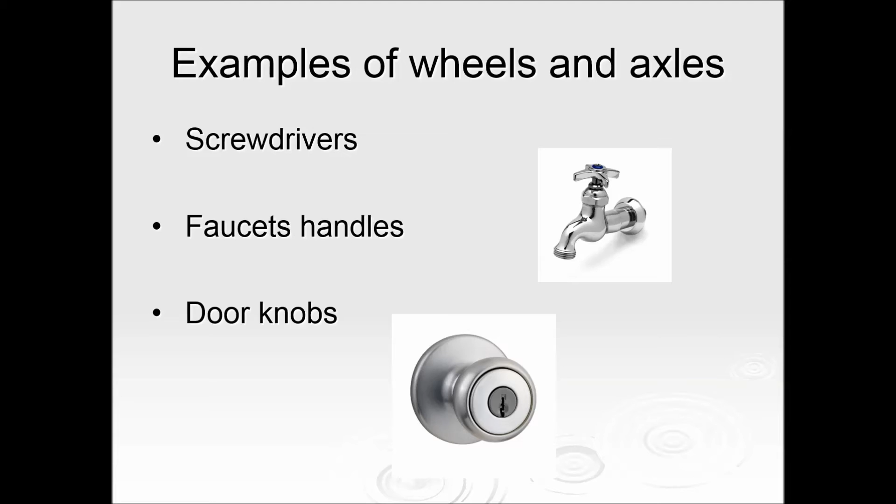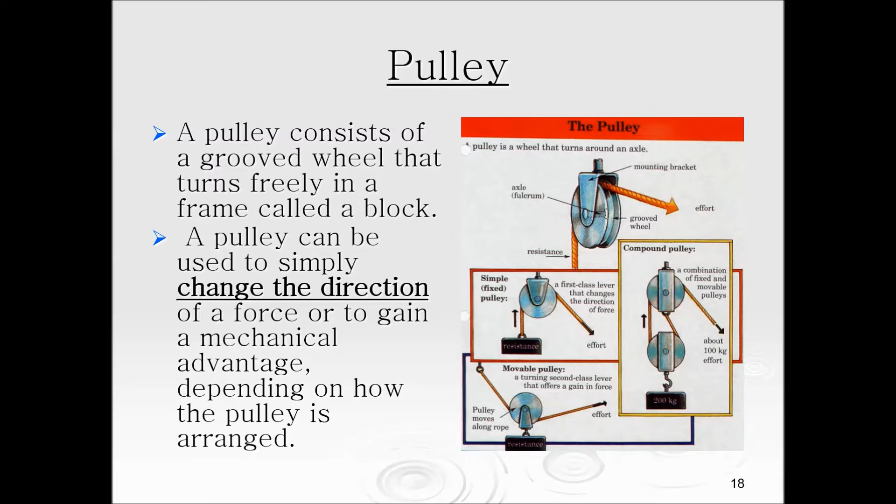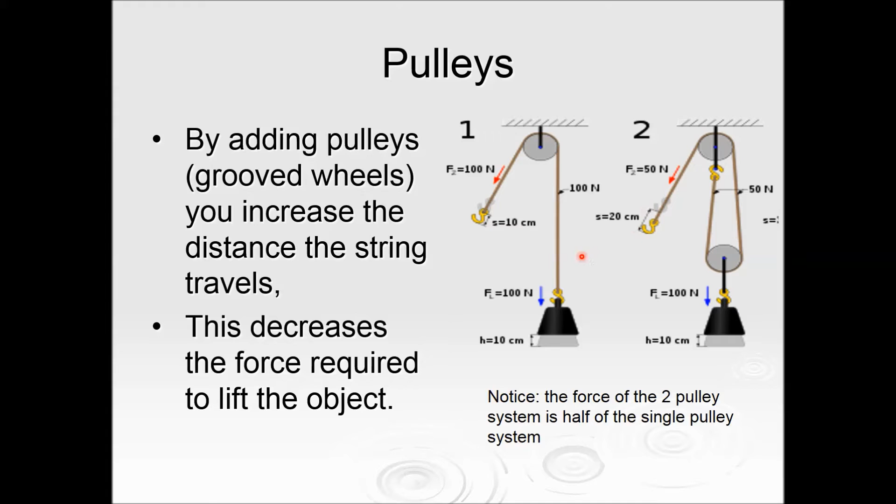We have two different types of pulleys. One is called a fixed and the other is a movable. A fixed pulley does not move with the load. So up here at the top, we've got the fixed pulley. Notice the string is going to move, but the location of the pulley is not going to move. These change the direction of the force, but do not change the amount of force or the size of the force required. So fixed pulleys change the direction of the force, but not the size or the amount.

A movable pulley, on the other hand, is attached to the load. And these do not change the direction, they change the size. So on your paper you should have a movable pulley. It is attached to the load, so it moves with the load. And movable pulleys change the size of the force, but not the direction.

So this one you can see is a movable pulley here. I still have to pull up to get the object to move up. This one down here, notice the string is going to move up and the load is going to move up. So this is actually a double pulley system, whereas this is a single pulley system. And this one's movable and this one's got a fixed pulley and a movable pulley.

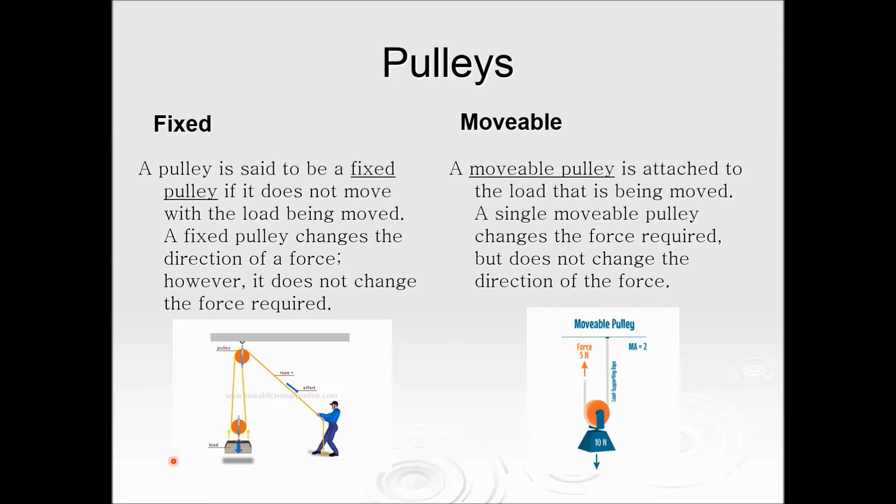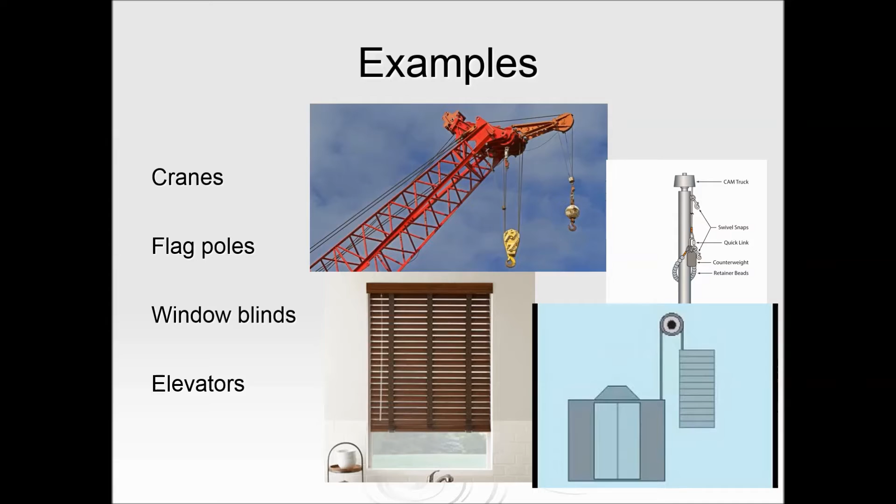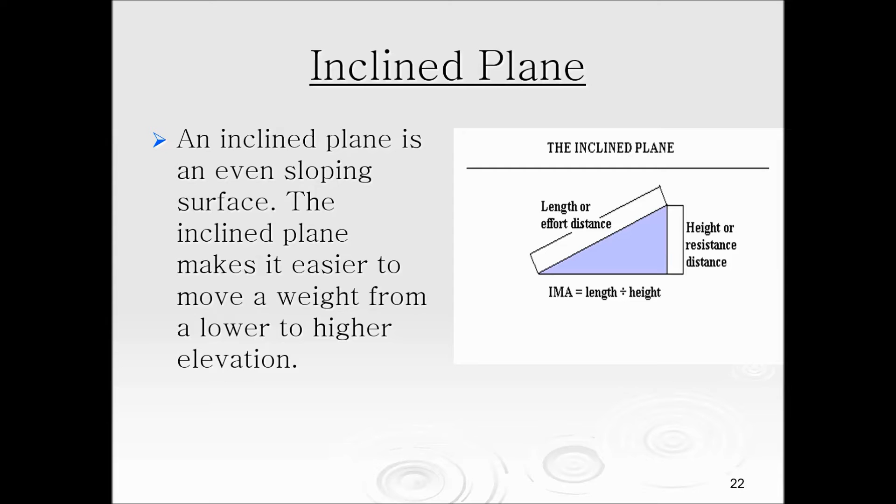So pulleys mostly change the direction of the force, but the more pulleys you add, the more it's going to change the size. So let's look at another super common kind of simple machine called an inclined plane. These inclined planes are sloping straight surfaces. And it makes it easier to move an object because it's increasing the distance the object is moving.

So as the length of the plane increases, so the longer the ramp length, the less force is required. The longer your ramp, the less force is required. So the force required decreases.

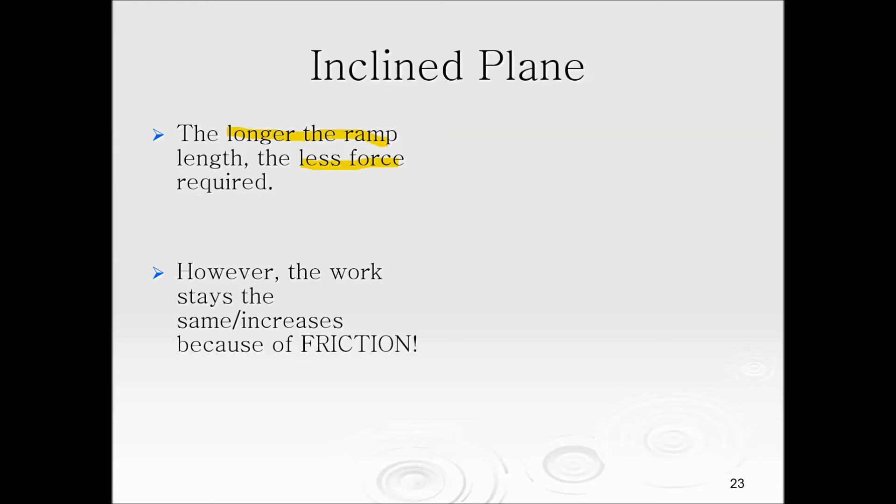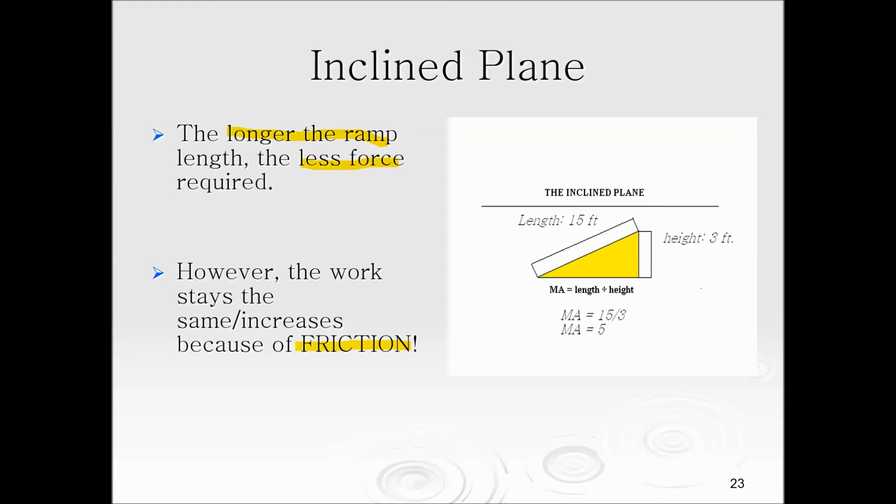However, we're always going to have the same amount of work because you're never going to get less work out of a machine. When we're talking about simple machines, we're not talking about reducing the amount of work. We're talking about making the work easier. And we make the work easier by reducing the force and adding distance. But it's always going to be the same amount of work because of friction.

Triangle shape. One of the ways that you know you have an inclined plane is that we're moving objects up it and it has a triangle shape.

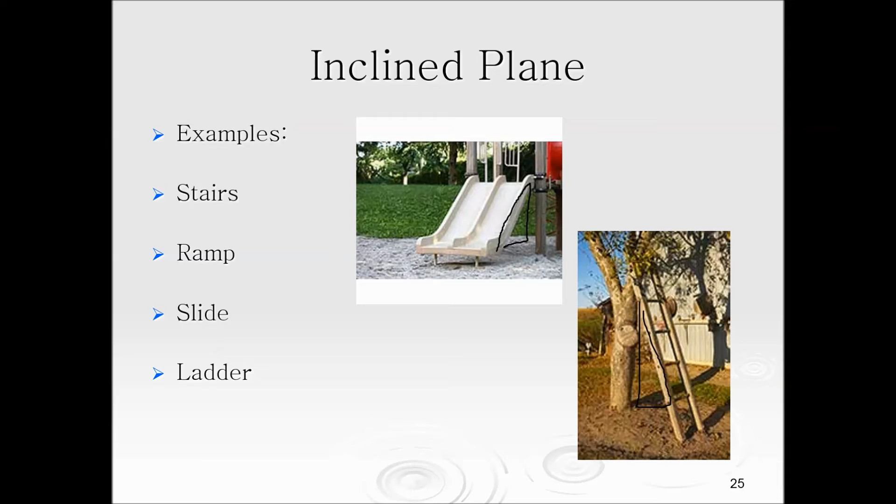A wedge is very, very similar to an inclined plane, as these are two inclined planes that are attached, or a double inclined plane, but these move, whereas most of our inclined planes are going to be stationary. You don't want a ladder to move when you're climbing on it. That's really dangerous. You don't want stairs to move while you're climbing on them. If they move away, you could fall and hurt yourself. But wedges are designed to move because they are used to cut things or to pin things together.

So some other examples of wedges are the head of the axe, not the body of the axe, but the head of the axe. A push pin, notice it's got that pointy edge and it cuts through paper to then hold them together. A safety pin, because it cuts through the clothing to hold it together. Those are all examples of wedges.

A screw is also related to an inclined plane, except this is an inclined plane that's wrapped in a spiral. So notice that they have tried to show you what a screw looks like using a piece of paper. So we've taken our inclined plane and a metal core, and as we wrap it around, do you see the threads that have formed, how it looks similar to a screw? That is exactly what a screw is. It's just an inclined plane wrapped in a spiral.

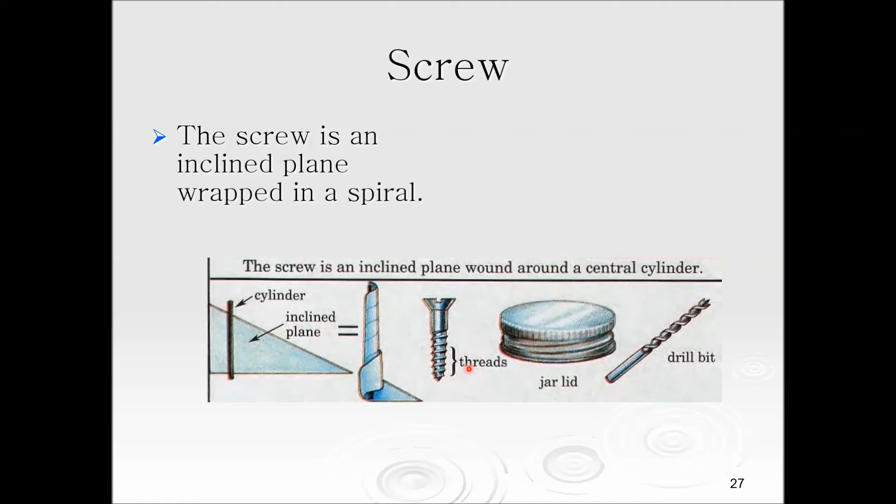And so we have a lot of different examples of those, but let's talk a little bit more about how it works. So we see that the more threads you have, or the closer together your threads are, the more force actually ends up being applied. So maybe you use 10 newtons of force on the screw, but you get 20 newtons of force out because it's going over such a large distance that you actually end up using less force. So the more threads, the less force you have to use, the more force you get out of your machine.

So some examples are jar lids, bottle caps, traditional screws, a spiral staircase, because it's an inclined plane wrapped in a spiral. So we see that they're used pretty frequently to hold things together, or to fasten things typically.

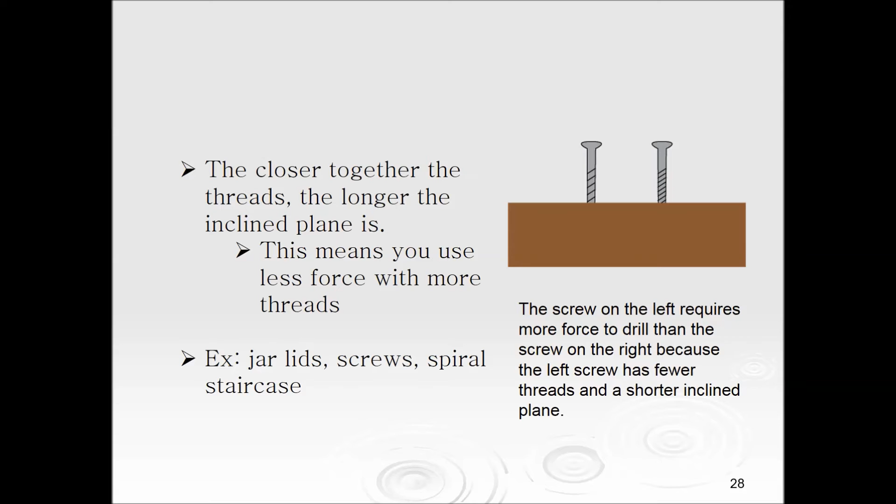So those are the 6 different types of simple machines, and we can actually compare them and evaluate them based on what they do for us. And the way we do that is using something called mechanical advantage and mechanical efficiency. So let's talk about mechanical advantage first. It's a comparison to see how good your machine is.

And so the first thing we need to talk about is the input force. The input force is the force that you apply to the machine. So on your paper, write that the input force is the force you apply to the machine. The output force is the force that the machine exerts or uses. So this is what you get out of the machine. It's the force that's applied on your object.

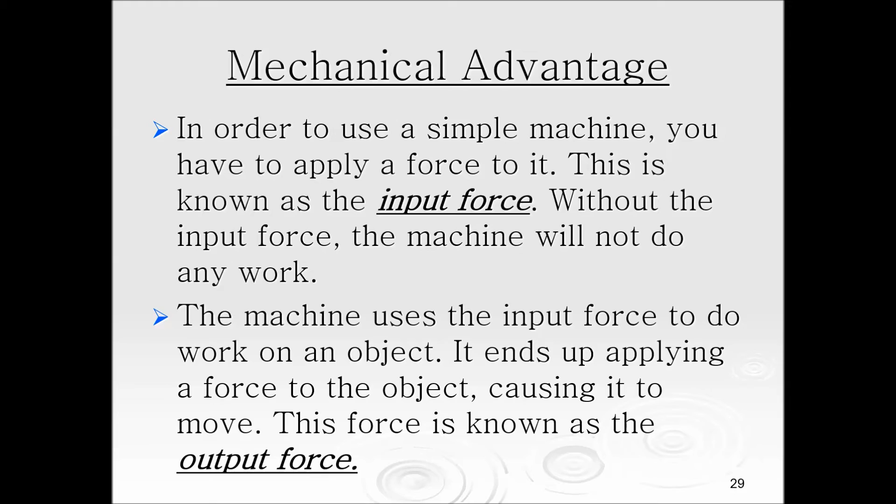And so mechanical advantage relates those two by telling us how many times the machine multiplies the input force. So if I put in 2 newtons of force in the machine, how heavy an object can I lift? How much force will I get out of the machine? So it's how many times the input force is multiplied by the machine. Please take a minute to pause this video and write down this equation. Mechanical advantage equals output divided by input. It's really important.

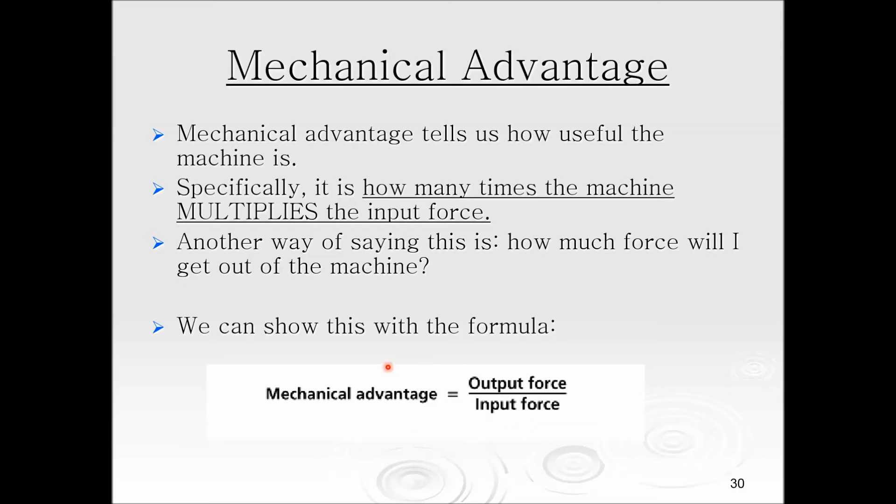Notice we're still talking about mechanical advantage. There are no units for mechanical advantage because force is always measured in newtons, so these end up canceling each other out. So mechanical advantage is just a number. So my machine is going to have a mechanical advantage of 2, meaning I get 2 times the

force out of it. If your mechanical advantage is less than 1, then it is not a good machine. You're going to wind up putting more force into the machine. It's going to make your work harder, and it's not something we want to do. We always want to make the work easier. We want to use less force. So if your mechanical advantage is less than 1, it's probably not a machine we're going to use.

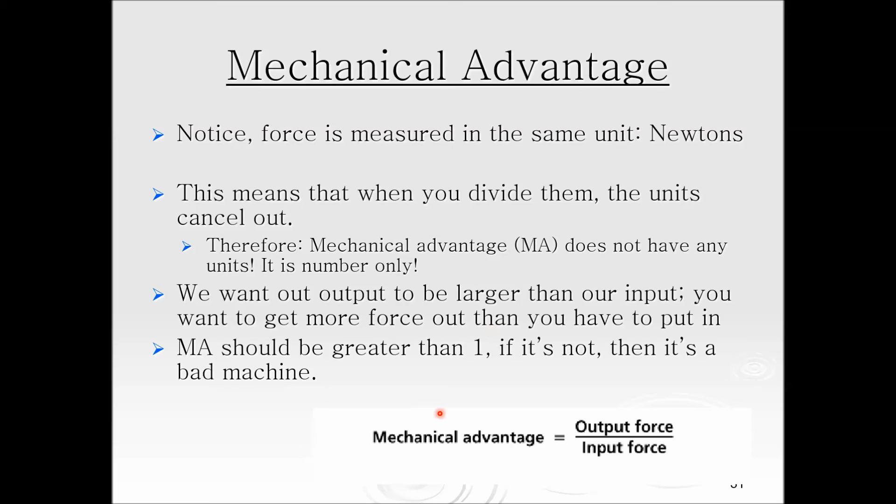And the other way that we rate our machines is with something called efficiency or mechanical efficiency. It's how well the machine uses the energy or the work I put into it. You may have heard me refer to you guys as working efficiently or not. An efficient science student completes their work on time, is focused, and is not doing other things. Somebody that is distracted or socializing or working on math homework in science is not working efficiently because they're not using the time and the energy on science.

So we can say the same thing with machines. An efficient machine uses the majority of the energy or the work put into it. And we have a formula that relates that. Please notice it is multiplied by 100 because efficiency is written as a percentage. So take a moment to pause this video and write down this equation.

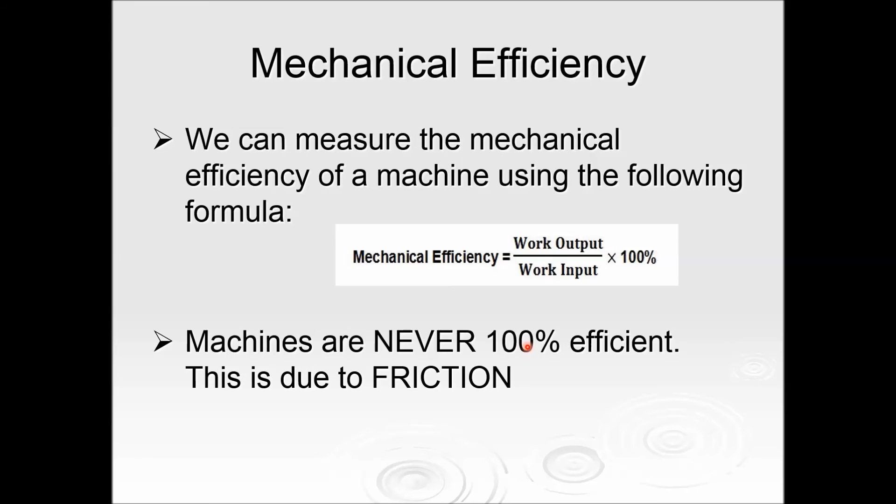We see that machines are never 100% efficient. This is because of friction. We are always using some of the energy and some of the work to overcome friction. As you increase the distance that the object is moving, we're going to have more friction because you're going to have more contact between the surfaces. So some of that energy that we put into the machine has to be used to overcome friction.

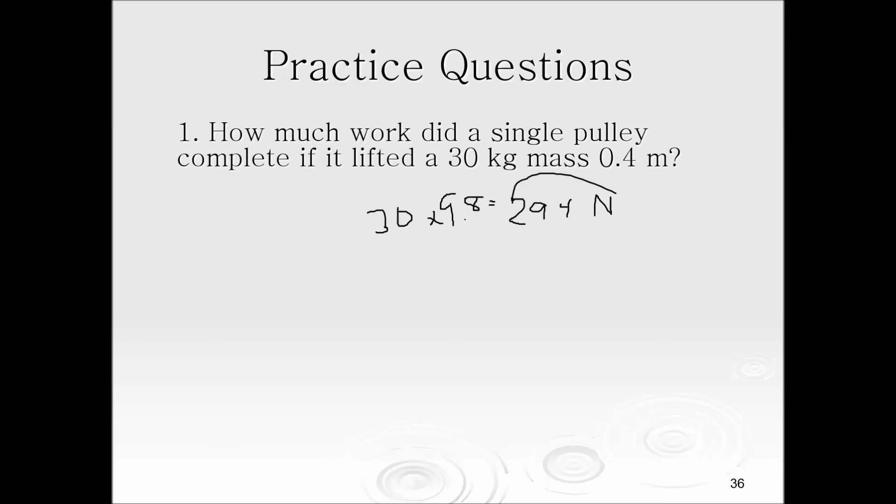But we can reduce, sorry, I'm trying to find that problem. So when we multiply 30 by 9.8, we find out that the force needed to move this object is 294 newtons. So if I know my force and I know my distance, I can multiply them together and I can figure out my work.

So 294 times 0.4 is 117.6 joules of work. So that pulley did 117.6 joules of work.

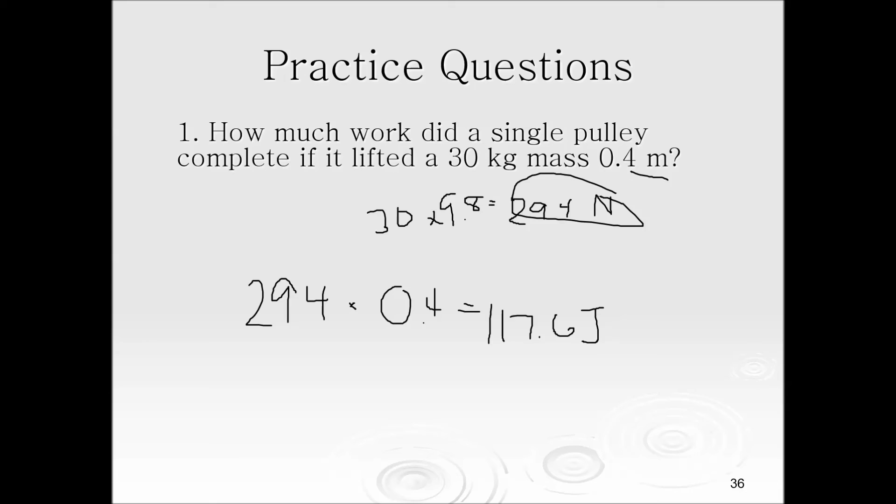Let's look at mechanical advantage. What is the mechanical advantage of a lever that gives you 10 newtons of force output after you've put 2 newtons of force into the machine? I'm going to put my output first, which was 10, and divide that by 2 newtons. Pardon my handwriting. 10 divided by 2 is 5. So this machine has a mechanical advantage of 5. Notice there are no units because the units cancel.

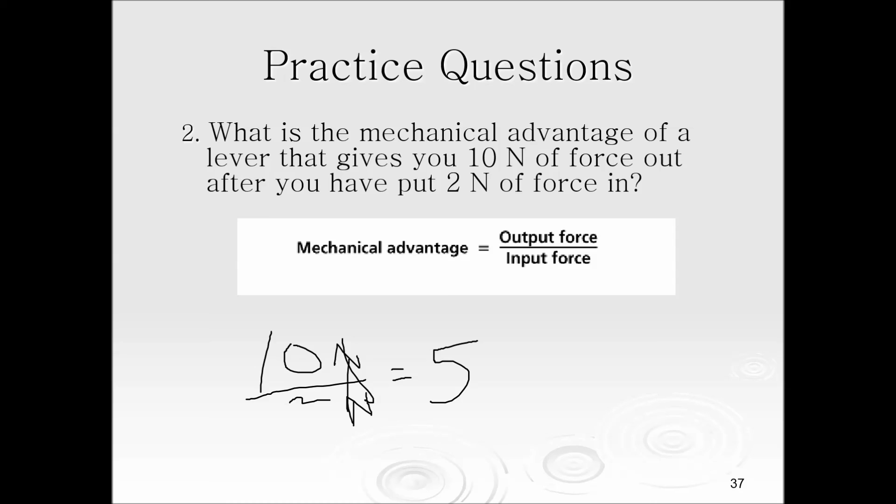If a wheel and axle has a mechanical advantage of 2, how much force would you get out of the machine if you put 10 newtons of force into it? So we need to rearrange this equation. I'm trying to get output force by itself, so I have to first get rid of the input force, and I do that by multiplying both sides by the input. So we get the mechanical advantage times the input is equal to the output.

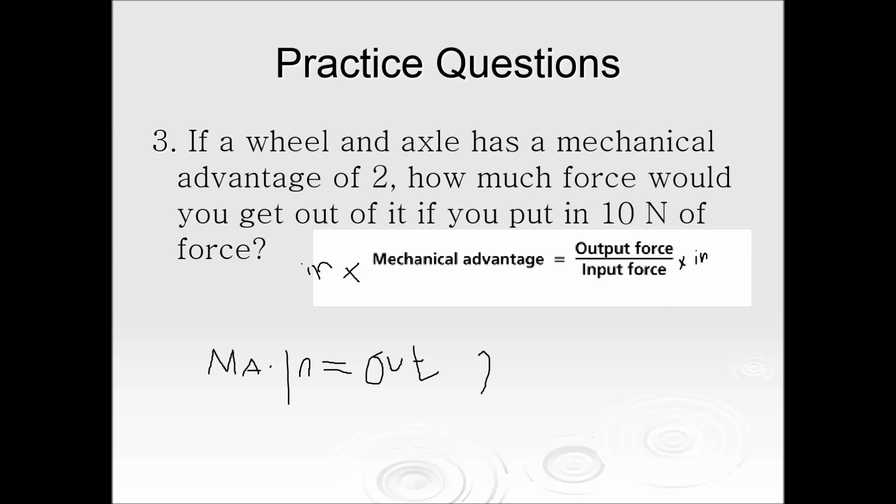So we should have 2 times 10 equals 20. So I should get a 20 newton force out of the machine if my machine has a mechanical advantage of 2. I'd say that's a pretty good simple machine there.

So I'm going to divide them. Output goes on top, divided by the input, which was 500, and we multiply that by 100. So 300 divided by 500 is 0.6, times 100, because order of operations here, people. So we see that this machine was 60% efficient. Not too bad. Not too bad at all.